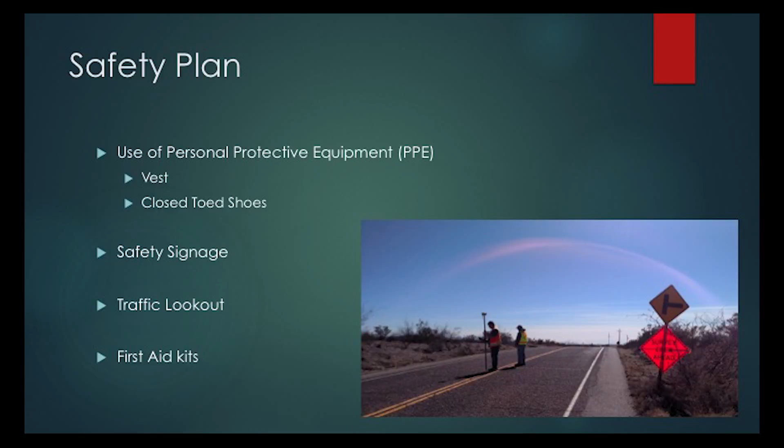Some local hazards: sometimes we encounter wildlife, pretty scary. Coyotes, pretty common. Rattlesnakes, definitely don't want to get bit by one. Heat, we live in the desert Southwest, especially in the summer temperatures can go easily above 100. Again, snakes, stay away from them, they're no-go. And traffic, like I was saying, especially in our location at 35 miles an hour, definitely don't want to get hit.

So property information: the property was owned by Welzie W. Webb, he lives in Fort Worth. It's tract 16 Soledad, this is number 2. It's 10 acres more or less, and the property is split into 2 zones, flood zone A and flood zone X.

Zone A is the 100-year floodplain, and flood zone X is the 500-year floodplain, and then it's zoned residential district 2, ER2.

That brings us to the zoning classification. Right here, outlined in red, is our parcel. If you go over here, we have the fire station, and then there's a couple electricity lines out there. The most important zoning requirements are the minimum lot size of 2 acres, and minimum front setback of 25 feet.

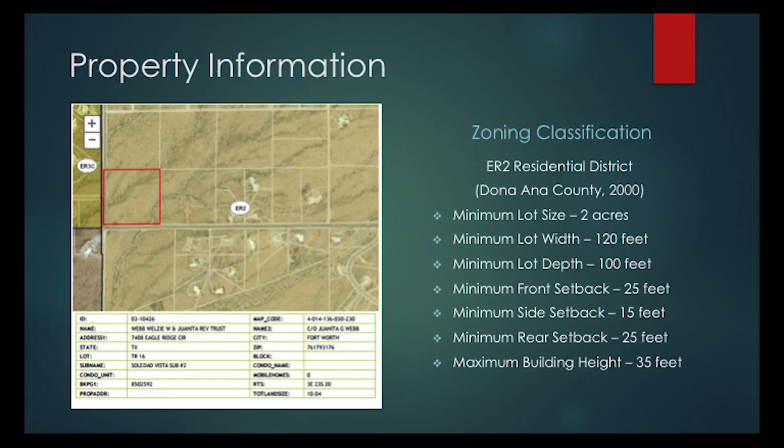Our first step was getting permissions from all the adjoining property owners and our subject property. We contacted them by phone. One of the adjoining property owners is actually a professor at the university, so it was really easy to contact him and get him to sign the paper.

Phone call was the most effective way to contact most of the people, and then correspondence through email after that was effective. The history of the property: this is the original GLO plat, surveyed in 1858 by John Garretson. It's a fractional township, and we're in section 20 on this township, so we didn't really have to worry about the fractional part.

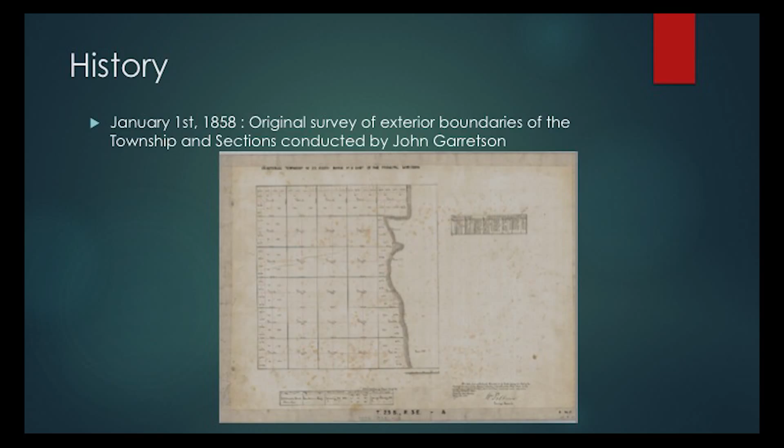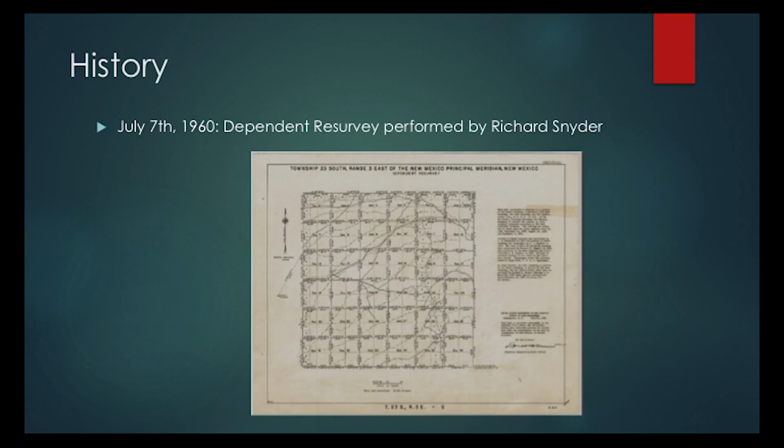Here's the dependent resurvey done by Richard Snyder in 1960. They completed the township, and this is the plat that was used for the subsequent plat and subdivision.

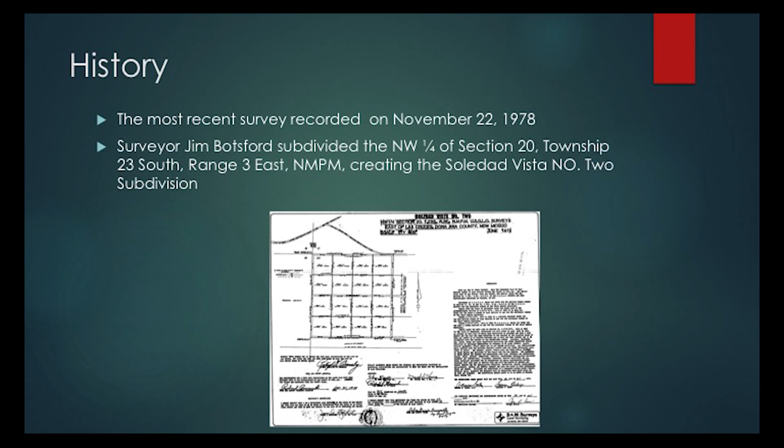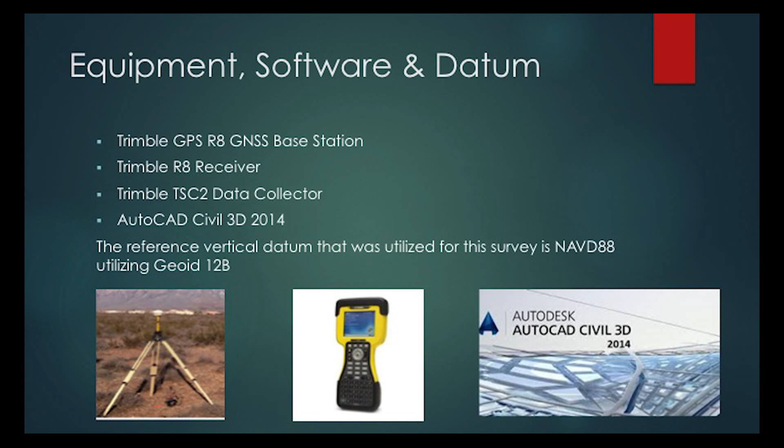So for the field work, we went ahead and used a Trimble R8 GPS. We used the base and the receiver with the TSC2 data collector, and we used AutoCAD for all of our drafting needs. With the data collector, we used the NAVD 88 Datum and the Geoid 12B, which I'll get into in a little bit.

So for our retracement, we started searching for existing monumentation. While we were searching, we were running a 4-hour static observation. When we found existing monumentation, we ran a 2-minute RTK shot on it. We ended up finding the northwest and northeast corner of our parcel. We used that as our basis of bearing, and we checked into the northwest corner of the section, and it fit fantastic.

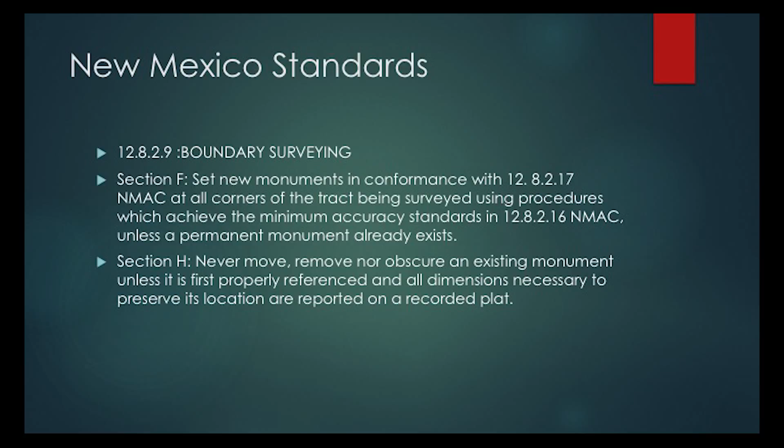So basically, in New Mexico, the minimum standards say if we don't find a monument, you have to reset it or restore its integrity if it's disturbed. For this purposes, we didn't set one, but with that in mind, we would have.

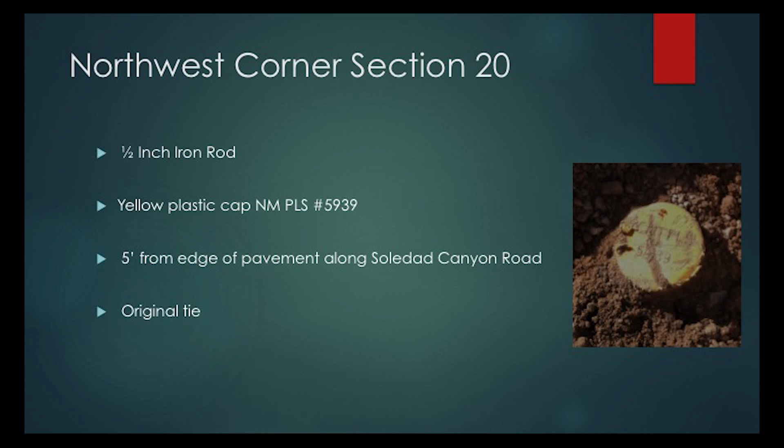So for the northwest section corner of section 20, it's a 1/2-inch iron rod, yellow plastic cap, 5 feet from the edge of pavement along Soledad Canyon Road. This was an original tie on the Botsford plat that we used, and we used that to check our basis of bearing and our distance.

Then in the northeast corner of our tract, we found a 1/2-inch iron rod. There wasn't a distinguishing cap on it, but at this site was a 48-inch tall pipe that was used for line of sight. They're just tall enough to be over the bushes, and we actually found them on adjoiner lots.

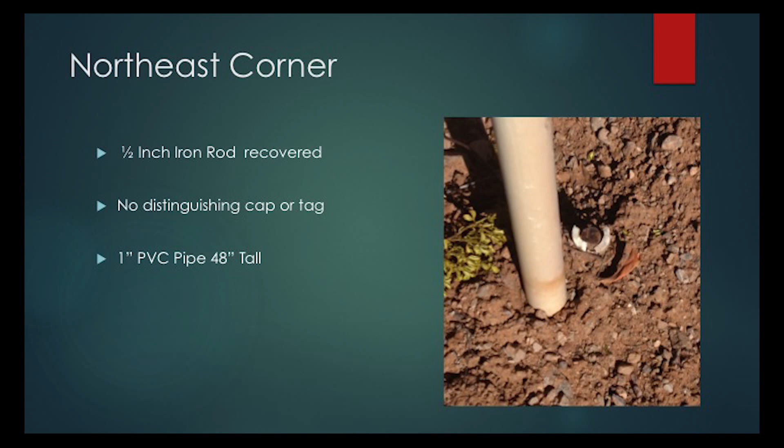At the northwest corner, about 15 feet off the road, is an iron rod, yellow plastic cap 5939. That's actually Botsford's partner, not Botsford himself. But as they were part of the company, we went ahead and accepted it. It had existing evidence and it also had the pipe.

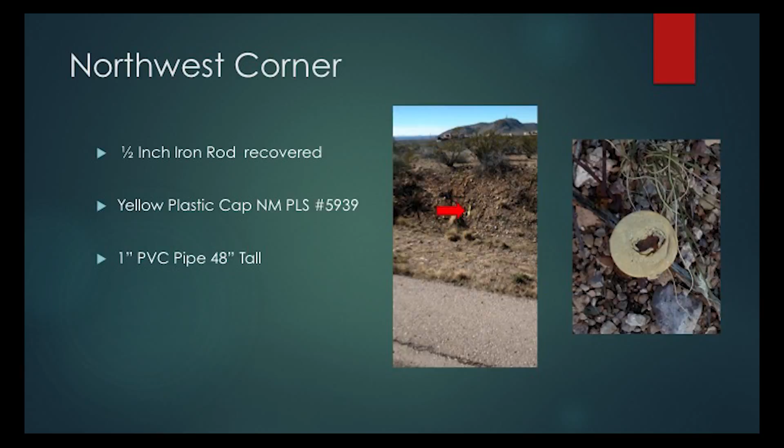In the southwest corner, we weren't able to find the monument. Soledad Canyon Road runs right there, and it seems to be destroyed. So we went ahead and it would be reset with a 1/2-inch iron rod. New Mexico standard says the rod needs to be a minimum of 1/2 inch, 16 inches long, with some type of identifying marker such as a plastic cap or aluminum cap.

And at the southeast corner, this monument actually lands in the center line of Soledad Canyon Road. Unable to find any monuments there, we would have went ahead and reset a mag nail with a washer on it. We set these at record because we use that basis of bearing. We checked into the adjoiners, we checked into the northwest corner of the section, and it all fit, met minimum standards. That's pretty common in New Mexico, to use the record.

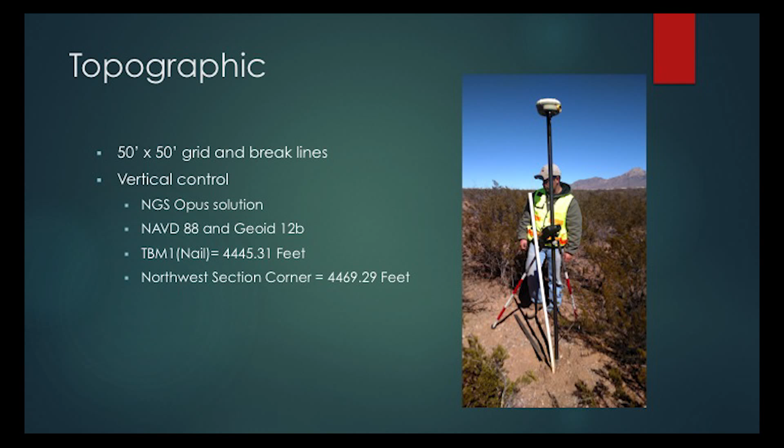For the topo itself, we did a 50 by 50 grid, catching all the break lines in between. Our vertical control was set up off that 4-hour static observation using an NGS solution. It utilized NAVD 88, and the data collector was set up with the Geoid 12B. We set that nail on site for vertical control, and then we also gave a tie back to the northwest section corner.

Going into the easements, there's a 90-foot wide road easement on the westerly and southerly boundaries. This encompasses all of Soledad Canyon Road on the west, and it runs down the center line of Soledad Canyon Road. The boundary runs down the center line of Soledad Canyon Road on the south. Then on the easterly and northerly boundaries, there's a 10-foot wide utility easement, 5 feet on both sides.

It's just New Mexico standard that 90% of the points tested shall be within 1/2 the contour interval. We meet this by using the NGS Opus solution. And that's only for a topo, that's not for the boundary.

So next, I'll talk about the site analysis. We did topography and geology. Our parcel is relatively flat, and there's 2 naturally occurring drains that we commonly call arroyos, and those arroyos come from the Organ Mountain runoff.